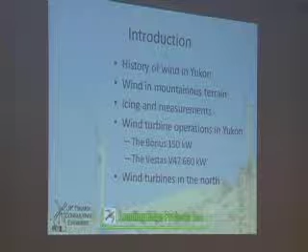This presentation is a mixture of two things. One is about monitoring, and I'll also provide a conceptual idea of how wind works, especially in these parts of the world, and talk about monitoring and icing concerns. Then John will talk about icing mitigation with respect to wind production.

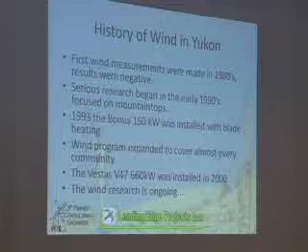In the Yukon, there's been wind monitoring activity since the 1980s. There were a few stations installed in places that turned out to be negative and didn't show very much promise for wind. However, part of that was because we didn't understand it very well.

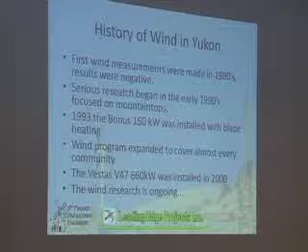In the 1990s, there was a much more serious effort, especially by Yukon Energy, to monitor the wind and understand whether there was potential. It took a geologist named Douglas Craig to understand that it was actually windier on mountaintops than in the valleys. He knew that because he would fly up to these mountain sites to prospect for geology, but then realized maybe it's windier up there after all.

That spurred a new hunt, like a little gold rush for wind, which helped Yukon Energy do more monitoring on the mountaintops, resulting in the installation of two wind turbines.

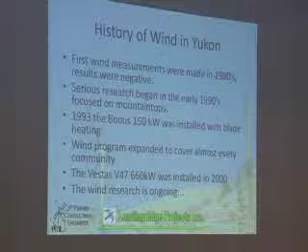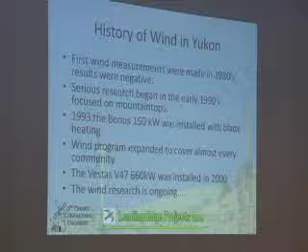There's been a fairly extensive wind monitoring program throughout the Yukon over the last 20 years, and it's still going on. One of the problems we had with setting up towers is sometimes we'd put them in places and realize that wasn't a very good place after all, and maybe we should have tried to understand it or model it.

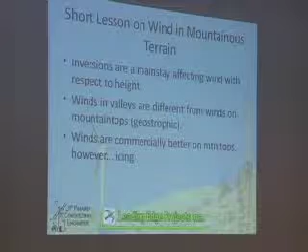That led me to go back to university to understand how wind works, what affects wind, what makes wind flow in mountainous terrain. Some of the things I've found out, I'm showing to you now.

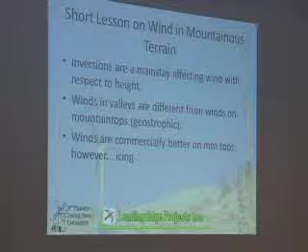One of the main, very important things that happen up here is a temperature inversion that occurs in the winter, and that affects how wind flows, especially with respect to height. Winds in the valleys are typically very different than winds on mountaintops, and I'll show you more later. The word geostrophic means air that flows way up there that's not affected by the ground, but it flows because it's affected by the earth rotating.

As a result, because we know wind is more prominent on mountaintops, we also need to be aware that there's icing issues, which we found out in Yukon.

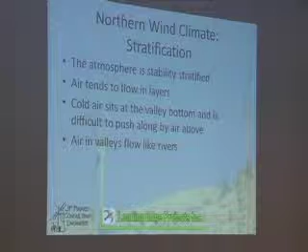Stratification is the result of temperature profile differences between top and bottom. In the winter, the air tends to get colder near the bottom, and you get dense air sitting at the valley bottom, which tends to prevent any wind motion from above from pushing down into the valley. So this cold air tends to sit in the valley bottom. Imagine when you're in a valley, the wind tends to just follow the valley axis, just like a river does. It's very similar to how a river flows.

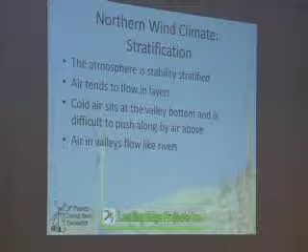Typically your temperature will increase all the way down to the surface, and that's what you see in the summertime. But in the wintertime, the air cools down quite a bit at the bottom in the valleys. Just imagine the mountaintops beside us, and we're in a valley here. I'll move forward a few slides to show you where that is.

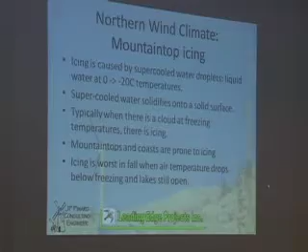Uh-oh. I can't go back. Am I going forward or backward?

When you think about a river, the maximum water speed is usually right in the middle, somewhere near the top of the surface, just below it. So it's just like this - the air that flows in the valley tends to flow like a river. That's the wintertime, so you get this inversion.

Then in summer, your profile tends to be more neutral, and of course in the summer there's not as much wind, but you get more evenly distributed wind speed throughout the layer from the valley bottom to the mountaintop.

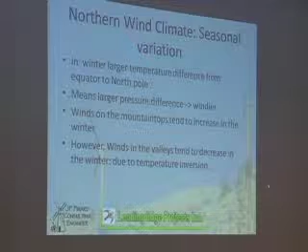So why the seasonal variation? As I pointed out, your summer winds are less than your winter winds. Why is that? Well, if you imagine the globe, the Earth has the equator, and the sun shines on the equator. All that heat is produced near the equator, that warm air rises, and then it goes towards the poles. The poles are colder because they're not as warmed up by the sun.

So in the winter there's a bigger temperature difference because our pole is a little further from the sun, so it's colder. There's more air exchange between the equator and the North Pole in wintertime. More temperature difference means higher pressure difference, and higher pressure difference means it's windier in the winter.

However, the winds in the valley tend to decrease in the winter, and that's because there's not as much sun shining in the north. So in the valley the air just cools, and whatever cold air is produced anywhere, it drifts down into the valley because cold air is denser than warm air. So the coldest place is always at the bottom of the valley, anywhere you go.

So if you want to get warm, just climb up a hill, and when it's really cold in the winter, just climb up a hill and you'll find that it gets warmer.

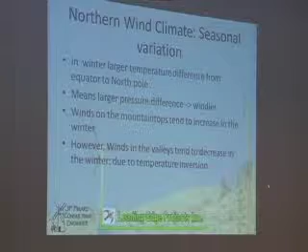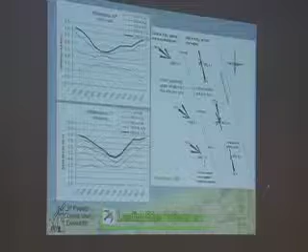Winds above mountaintops are typically geostrophic. That means when you're well above the surface of the Earth, the wind follows the pressure lines. The reason they do that is because the Earth spins. If the Earth wasn't spinning, the sun would heat the equator and the air would simply go north towards the pole and mix. But because the Earth is spinning, it causes the air to move due to the Coriolis effect. The rule of thumb is, when you're way up above and you're following the wind, usually your high pressure is to the right and your low pressure is to the left.

And so you get these high pressure and low pressure systems, and the air moves along parallel to these pressure lines. Now that's the opposite for the Australians—the high pressure is to the left instead. Just a note for you guys.

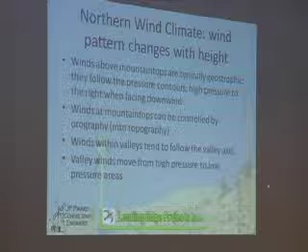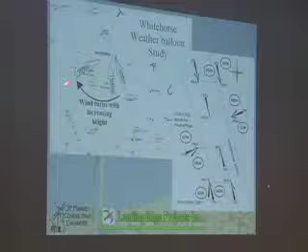In the valley, though, like I said earlier, the wind is still very much controlled by the valley axis. It responds to pressure, but it's controlled by valley axis. This sort of illustrates that—this is the prevailing wind coming from the southwest in the winter, well, all year round. The average winds in the Yukon over the mountaintops come from the southwest. However, in the valley, it strictly follows that valley axis.

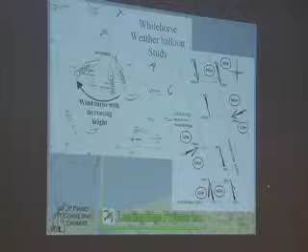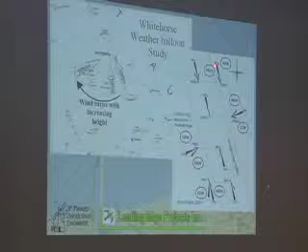This is another illustration showing that when your wind comes from—this is again the geostrophic wind, the wind well above the mountains—high pressure to the right, low pressure to the left. Wind comes from the southwest, and so the high pressure is what drives the valley wind. When the wind comes from the northeast, high pressure is to the right, and so that high pressure is what drives that wind from the north down the valley.

Now, moving on to icing issues. In the wintertime, the water that accumulates in the air can often be in a liquid state from 0 degrees Celsius down to minus 20 degrees Celsius. So, to make a point here, water can stay in a liquid form down to minus 20 degrees Celsius until it hits a hard surface, and then it crystallizes. So supercooled water will solidify on a hard surface, and that's what occurs when you have instruments out in the open and wind turbines running in cold weather, and clouds appear. Those are water droplets actually freezing on the surface.

Usually this is worse in the fall when there's open water, and it tends to lessen—there's less icing that occurs once the lakes are frozen in the winter, at least in our area. In the coastal regions, that would be different; there'd probably be more icing throughout the winter because the ocean provides moisture.

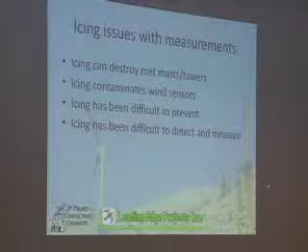Here's an example of a cloud that's over one of our nearby mountaintops. This would typically mean icing occurring in this scenario. So it can be blue sky everywhere else, but if there's a cloud forming on that mountain, there's typically going to be icing. And of course, icing has devastating effects sometimes—if equipment's not robust enough, it can fall over because of the load of icing on these instruments, and the sensors get damaged often. It becomes very difficult to measure the wind resource.

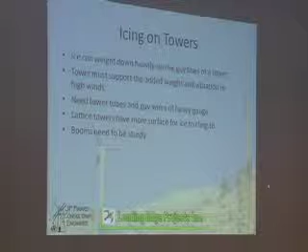And vibration, you know, the ice loading on towers can be hard. This is an example here of how much icing can occur on guy lines. It can get quite heavy, and you can see that the guy lines can get weighed down quite a bit. And that puts a lot of weight on the tower itself.

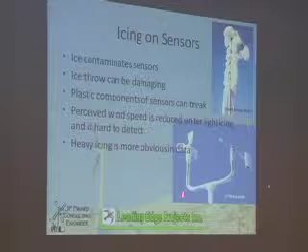And of course the sensors get covered up. This is just an example, one of a typical Environment Canada weather station, with just a little bit of icing. It's hard to tell when there's icing on the instrument. It just shows up as a lower wind speed, and that's a difficult thing to monitor, to flag when you're looking at data. But sometimes the instruments just get completely covered up, and damage can happen to the instruments.

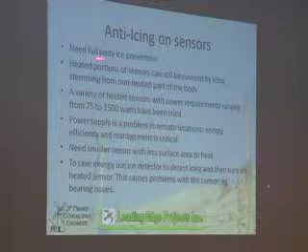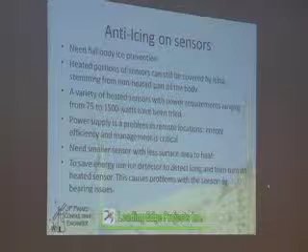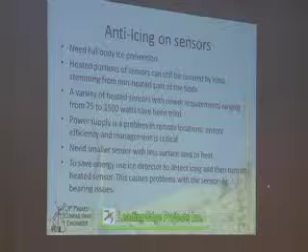Anti-icing, we've looked at that a lot over the years. Some of the conclusions we've come up with is it would be nice if there was a manufacturer that could come up with a sensor that can fully cover the full body of the instrument, not just part of it, and a sensor that could provide heat that is fairly low, because often we are in remote locations, and energy efficiency is optimum. Because when you're in a remote location, sometimes you might want to do monitoring at a site where you may someday bring a power line to, but you don't have a power line there yet. So your site is remote, it needs big battery banks, it needs renewable energy equipment, and so you need to have the lowest possible heating requirement that you can on an instrument. So the size of an instrument makes a big difference.

So what happens? We've tried various numbers of instruments. This one, for example, a German model, was completely heated, and it was great. It worked really well, but it required a lot of power.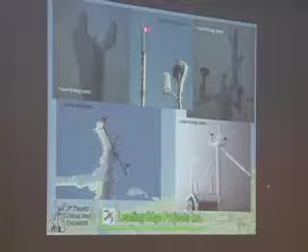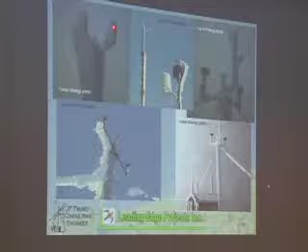This particular instrument used to be called the Handar, now Vaisala. There's actually a few of those in Alaska, I've noticed. But the problem we have with this one is the heating was only on where the sensor is, so the rest of the body would get built up with ice, and the ice would bridge over where the sensors are. These are ultrasonic sensors, and what they do is send signals between each little sensor, and when there's ice in the way, it screws up the reading.

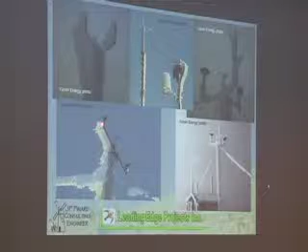There's other kinds of instruments that are heated, rotating instruments, and this is NRG, and they work well. But again, there's a power requirement that comes with that. So if you're grid connected, that's fine, but if you're not, then it becomes a problem.

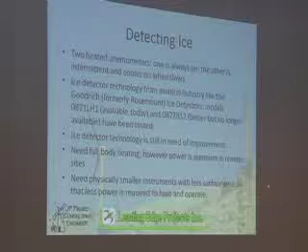On the story of ice detection, initially when we wanted to find out how to measure icing when it occurs, we would use two heated sensors, one that would be always on, and the other one intermittent, off. When icing would occur, the one that was off would start accumulating ice and would start to slow down, and that's where you would find it. So then we had controllers that would turn that on, and that would be an event. That's how we would find out whether icing was occurring - you turn the intermittent instrument on, melt the ice off, turn it back off, and wait for another icing event. That's how we would measure it.

Before we got hold of these particular ice detectors made by Goodrich. There's two models on the market - one that's available today, and one that used to be available but no longer is. They've talked about making this available again, and we're hoping they would. I'll show you a picture of that.

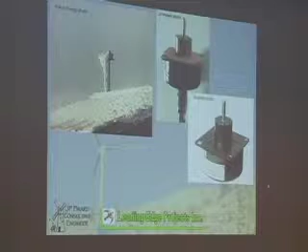These are the two models that exist: the one that we have now and the one that Goodrich is talking about making available.

This particular model is a sensor that has a nozzle that operates at high frequency, and when it builds up with ice, the frequency changes, so the instrument senses that and turns on the heater and melts the ice off the nozzle. This model here, most of the top half of the body would heat up and melt the ice off, and it worked effectively.

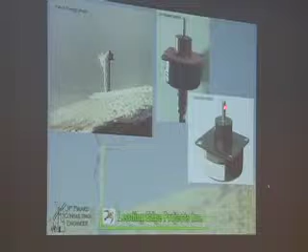This model here, however, doesn't have full body heat, it's just the nozzle that's heated. So what would happen is this whole thing would cover up with ice and build right over the nozzle, and it wouldn't work anymore. It wouldn't be effective at measuring anymore.

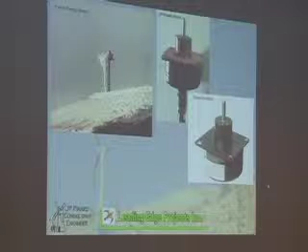So what I had to do in this particular case is add heaters to the whole body, and just turn the heater on whenever it detected ice, and that kept the instrument working a little better.

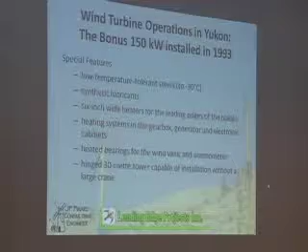Thanks, JP. So as Yukon Energy, we had to learn how to operate wind turbines in an environment that ice detectors showed accumulated ice 800 hours a year, so very severe rime icing.

And don't kid yourself, it's not a coastal phenomenon only. It's an altitude phenomenon that we've seen in central Yukon and northern Yukon, anywhere you go, so it'll be the same in Alaska. If you're in the interior and up on a ridge, you're going to get icing.

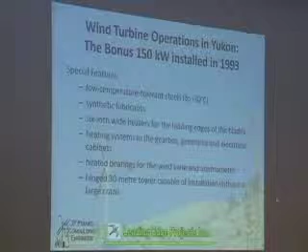When we started in 1993, we selected Bonus wind turbine, which was the small end of the commercial range at the time. We wanted a manufacturer that had proven technology. We didn't want to reinvent wind technology, we wanted to take good existing technology and just learn how to cope with icing.

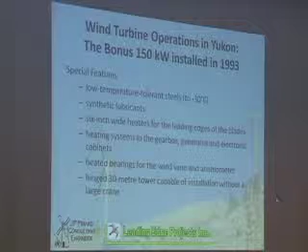So we selected Bonus. And just to put it in perspective, in 1993, there were some companies like Bonus that had a prototype 450 kilowatt machine being developed, to give you an idea of where things have come since then.

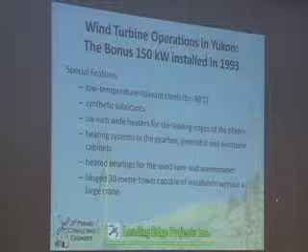And to deal with our situation, they designed the turbine to operate to minus 30 degrees centigrade, with synthetic lubricants, heaters on the leading edges of the blade, which after all are the most critical part, and some heating systems and various other pieces of equipment to prevent condensation and maintain temperature, etc.

And one other small thing, which, well, not so small I guess, but important for us, was looking at the possibility of a tower that could be installed without a crane.

But it meant that this turbine was assembled only with a small 40-ton local crane, so it certainly has some advantages in certain situations.

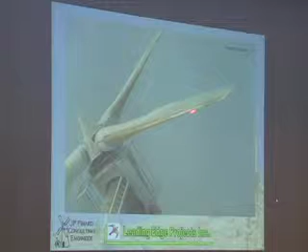Here's a photo of the leading edge heaters, the red strips that you can see. And one thing is this heat density here is relatively low, it's 1/4 of a watt per square inch, I think 400 watts per square meter.

So relatively low heat density, but adequate in light rime icing conditions to not only keep the leading edge clear, but you can see quite clearly it's keeping the suction side clear and a chunk of the pressure side as well. So it's just the warmer airflow or whatever discouraged the attachment of the icing.

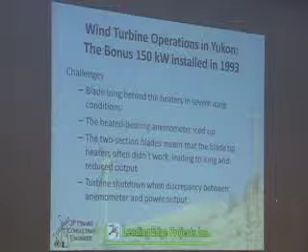The challenges that we faced were that the control instruments that came with the turbine had heated bearings, but that wasn't nearly enough. They suffered under severe icing, came to complete stop.

The stall regulated blade has about a 4-foot tip that turns to 90 degrees, which is the air brake, and maintaining electrical contact between the main part of the blade and this rotating aerodynamic brake was unsuccessful. Ultimately, we were not able to maintain reliable electrical contacts, so the blade heating in the very end of the blade had to be sacrificed.

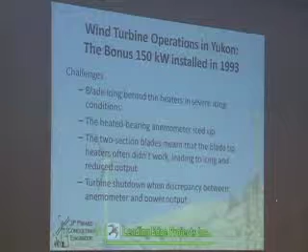And another thing that's worth pointing out here too is that the typical control algorithm for wind turbines is that if there's a discrepancy between the power output and the measured wind speed, there's a shutdown on the basis that there's an error somewhere.

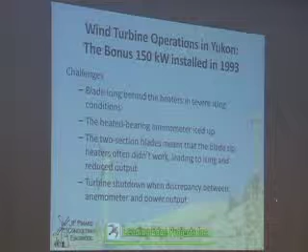And when you get icing, of course, you get depression of the wind speed. If you've got good anemometers, heated anemometers that measure the wind speed unaffected by icing, but the turbine blades are affected, power drops down. If the control algorithm doesn't recognize that a lower power output is quite all right when you have icing, because the alternative is to have nothing, then the turbine shuts down.

So to maximize energy production under icing environments, you really need to let the turbine run as much as it can, as long as safety isn't compromised through vibration or anything like that.

This is a picture of the Bonus 150 turbine, which did not operate through one serious icing event, because we also learned that overhead power lines in severe rime icing environments don't stand up. We had to go to a buried cable to get reliable feeder operation.

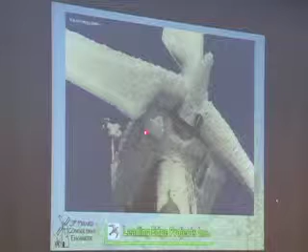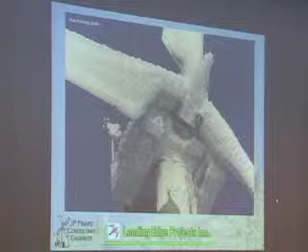In this case, you can see from this icing event, there's a handrail here on the catwalk for maintenance, and there's about half a meter, or about 18 inches, of ice built up into the wind from the handrail. This ball of ice here is the control instruments with infrared heat lamps on them trying to keep them going.

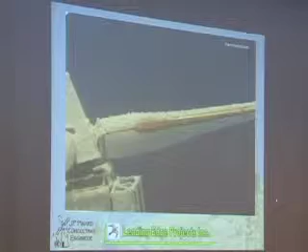And without power, they just became a ball of ice. Under severe rime icing conditions, we found that the leading edges stayed clear of ice, but you can see both the suction and the pressure side built up with ice. So we realized that 6 inches wide heating on the leading edge was not adequate for good performance.

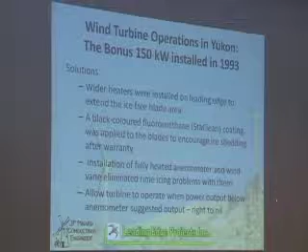So some of the solutions we dealt with: wider heaters. When we replaced electric heaters, we put wider heaters on the leading edge of the blade. We put a black fluorourethane coating on about 3 years after we first installed the turbine, because Bonus would void the warranty if we put it on to start with, since they were concerned about overheating of the blades in summertime and delamination of the fiberglass.

The black coating we put on in 1996, that same coating is on today, 15 years later. So there was a question about longevity. Well, if it's put on right, it has a very long life. On the Bonus turbine, it's been on for 15 years.

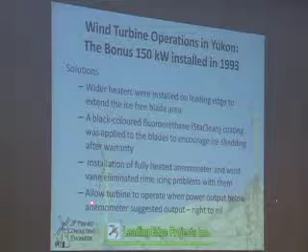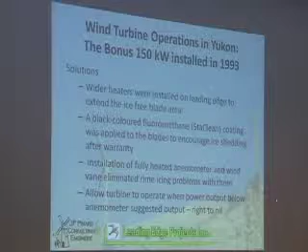Going to fully heated instruments was certainly necessary, and Bonus was also very good - well, I keep talking Bonus, it's Siemens now, of course. They were very good working with us to change the control algorithm of the turbine to allow it to operate at lower power levels than expected based on the wind speed, because getting some production is better than getting none.

All you need, with leading edge or full blade heating surfaces or black coating, is to loosen that surface where the ice is attaching, to loosen that ice from the surface. The wind will take care of blowing it away. You don't need to melt the ice, you just need to loosen it and scrape it off, or let it fly off.

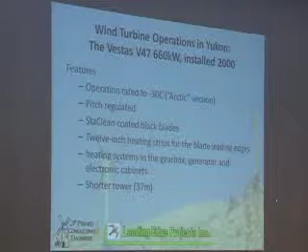To continue on with the work, we thought that a pitch regulated machine rather than a stall regulated machine might be more beneficial in an icing environment. We got funding for another turbine, and in 2000 we installed a Vestas V47-660, which at that time was again the low end of the commercial range. The big machines had become much bigger then.

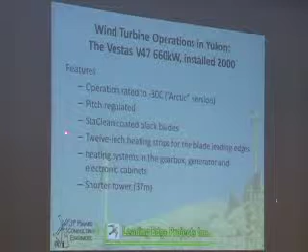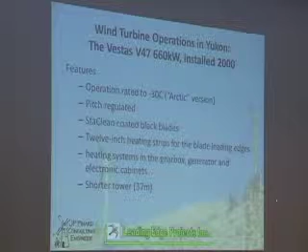So pitch regulated - Vestas was comfortable with black blades from the start, and we doubled the size of the heaters on the leading edges. And of course, without the blade tip brakes, there was no issue with continuity for heating the entire leading edge. At our request, we were able to get a shorter tower, so we didn't need such a tall crane to put it up. After all, this was a test site as opposed to production, so we could learn as much from a 37-meter tower turbine as a 50.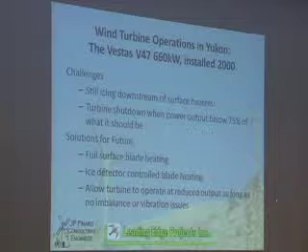So we still had some challenges. We still have icing downstream, as it were, of the heaters on the surface of the blade. Ultimately, the solution would be to heat the entire blade surface, and I'm really pleased to hear that some manufacturers will be coming forward with these options.

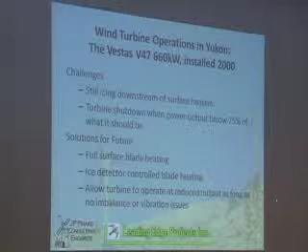Vestas was less willing to work with Yukon Energy at the time to change the control algorithm, and in fact they flat out refused at the time. So the turbine continued to shut down whenever the power output was down to 75% or less of what it should be, which meant that in fact the old stall regulated Bonus outperformed the Vestas machine during the wintertime.

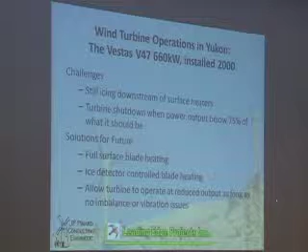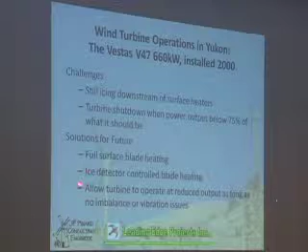And ultimately, for successful operations, full surface blade heating is required with reliable ice detectors to control the blade heating. But my view is that you don't need enormous amounts of heat, because you don't need to melt the ice. You just need to loosen it on the surface, and relatively low heat density will do that, particularly when it's got an ice coating on, because it's not exposed to the -30 or whatever.

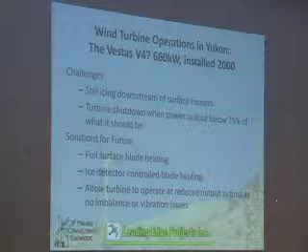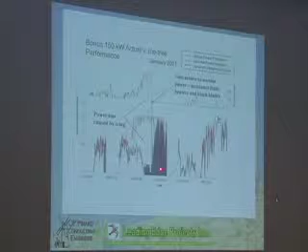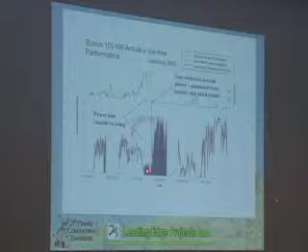And what we did to look at production losses is we developed an ice-free power curve, which is the red line here, and the blue line is the actual power being produced. So the production we would expect is in red, the blue is what we were getting. During an icing event here, you can see that we lost production pretty much down to 0. The upper line indicates the icing severity, and you can see following the icing event, the production comes back into line, and the blue and the red are back together, which is what normal performance is.

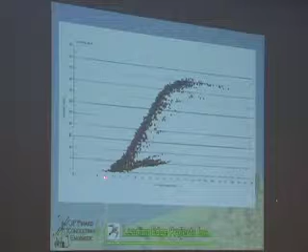This is a typical graph of 10-minute actual data. This was in March 2001, I think, actual performance data during the icing event. So quite a depression of the power curve with relatively modest icing because of the turbulent flow over the blades.

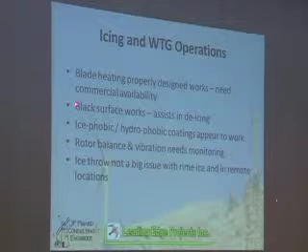So what do we need for operations in icing environments? We need blade heating that properly works, that is designed, and manufacturer supplied systems are certainly the way to go.

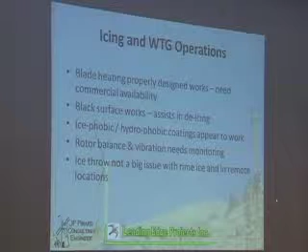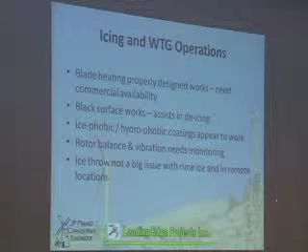Black surfaces certainly assist. The ice-phobic coating, well, it's kind of hard when you put it on black in the first place - it's hard to be sure whether the ice-phobic nature has made a difference or the black color or some combination. But for us, it was a relatively cheap solution for the benefit, even though per liter or per gallon, it's fairly expensive material once it's put on. Most of the cost is in the labor putting it on.

Rotor balance and vibration does need monitoring. We haven't seen big issues with our rime icing, and certainly with our rime icing, ice throw, which is a concern where you've got freezing rain and glaze ice, isn't a real concern for us, particularly because it's a remote location - you don't have people walking underneath these turbines.

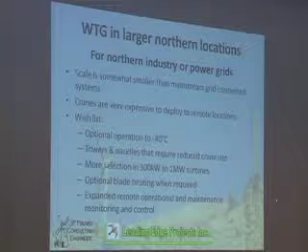So for larger power grids, ideally you'd have machines that could operate to -40 degrees and designs that minimize the crane size. It would be nice to have more turbines in the 300 kilowatt to 1 megawatt range, and there are still a few around. I'm pleased to hear that Enercon is considering installing one in northern Quebec that's 800, because it probably fits well - a good combination or compromise between crane size and turbine size.

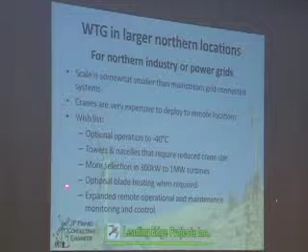And certainly it would be nice to have optional blade heating for situations where it's required - where it's not required, don't waste your money. In small communities, again, operation to -40 and optional blade heating is nice. Getting away from cranes, which is a big part of the cost, would be nice. Maybe in time that will come too, and I think more selection and more competition is always good.

And the simpler, the better. I can't overestimate getting local people involved and also expanding the remote monitoring and maintenance capabilities - it's become pretty much standard now, and I'm really pleased to hear the comments about that in this conference. So, thank you very much.

Any questions, very quickly? Yeah, great. Got battery issues - a second microphone. I can just talk about it. Yeah, just talk about it and we'll repeat your question, please.

I had problems with those black coatings getting them out to remote communities. I was wondering if you ran into the same thing of it being considered a hazard - I had to meet the hazardous waste standards, and also you said the price was in labor. I found if I tried to do that in a remote community, I didn't have the right atmospheric or room conditions for the proper application - I couldn't get the humidity down low enough. So I found it not capable of doing it out in the remote location.